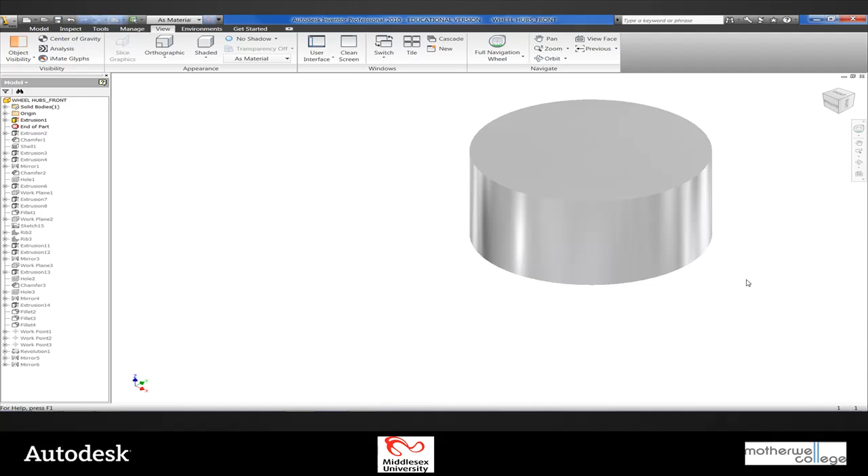And the hub started life as a simple extrusion like this. From this extrusion we added a second extrusion, as we can see in the browser here, and then this corner was chamfered, and the two side features were added as extrusions, with smaller extrusions added next, and then followed by a further chamfer and a hole running all the way through the part.

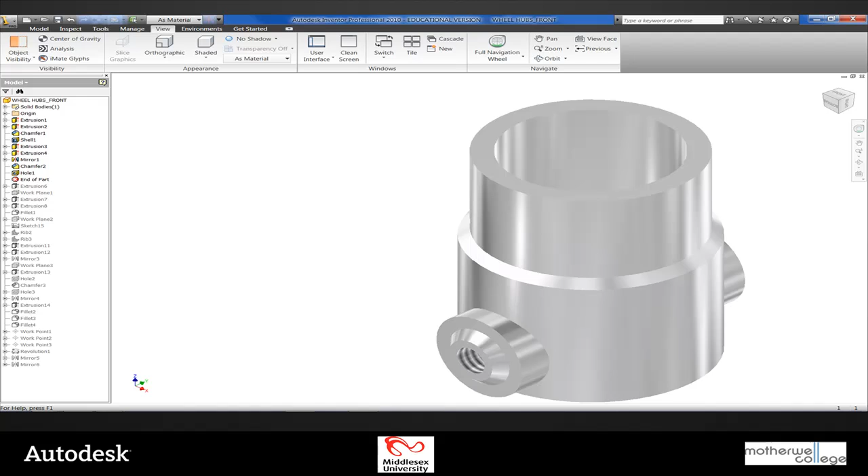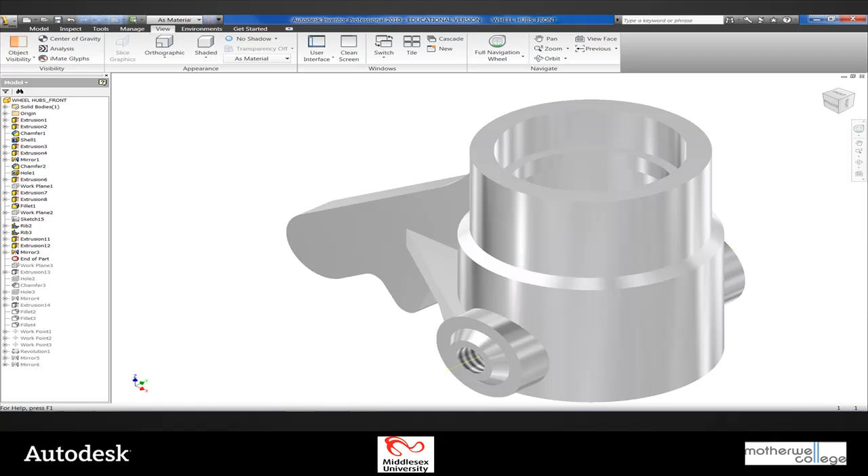This inner feature is added as a further extrusion, followed by this support on the front. The rib that adds the inherent strength to the hub starts life as this sketch, which allows us to use the rib tool and a second time for further strength, followed by an extrusion to add some shape. This hole is added near the front and then chamfered, followed by another hole here, which is tapped.

The mirror tool is used to place another instance of this rib, but on the front face, and then an extrusion creates the angled feature on the front here. A couple of fillets are then added, and the final couple of steps sees the part created.

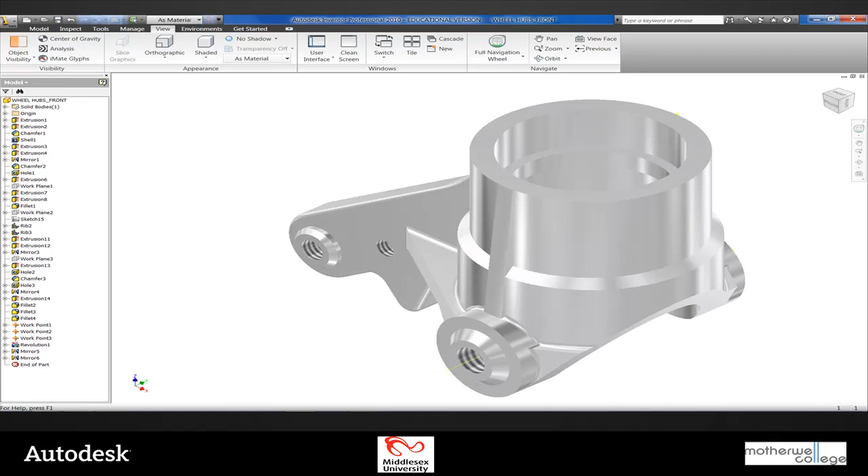So here is the part created in Inventor, and we're going to go through the steps in a step-by-step manner in order to illustrate exactly how this was modelled. So we'll open up a new part, say standard.ipt, and the first thing I'm going to do is to draw a circle centered on the origin,

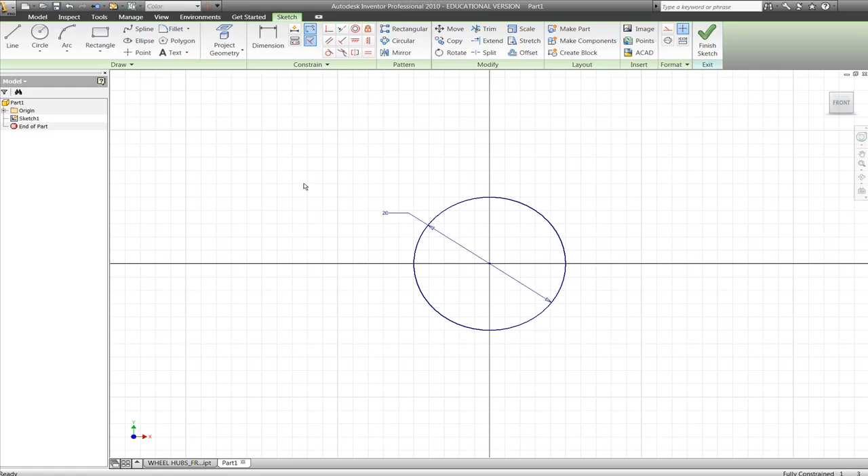and I'll either pick the dimension tool or type D and click on the circle, go away to place a dimension and edit that to 20mm diameter, hit return or click the green check. That gives us our 20mm diameter circle. So I can say right click, done for no more dimensions, right click again to finish the sketch, a third right click to go to a home view, and we can either click extrude or type E, and up comes the extrude dialog box. We're going to extrude that to a height of 11.5mm, say OK,

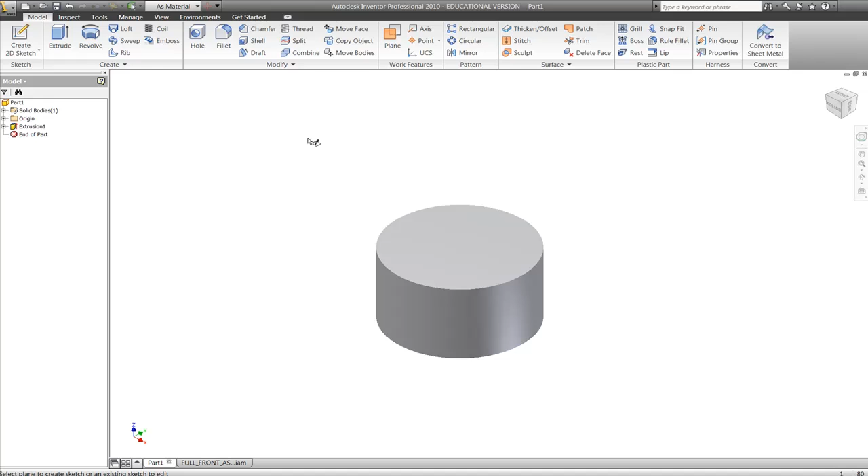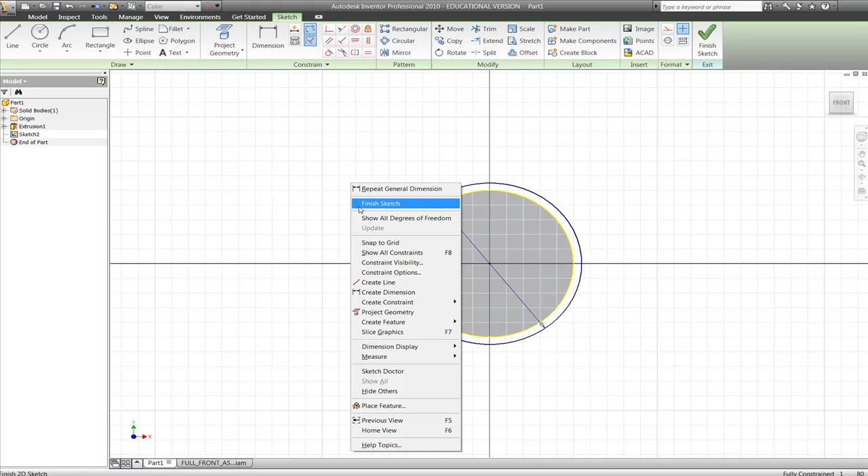and that's step 1 created from scratch. And the next thing we'll do then is to put another circular sketch on this face, so we'll click create 2D sketch onto that face, use the circle tool, pick up the origin, and we're going this time for a diameter, type D, of 22mm. We'll say right click, done for no more dimensions, second right click to finish the sketch, and we're going to extrude that sketch with the outer and the inner, a distance this time of 15.5. And that gives us the basic material to begin the modelling process with.

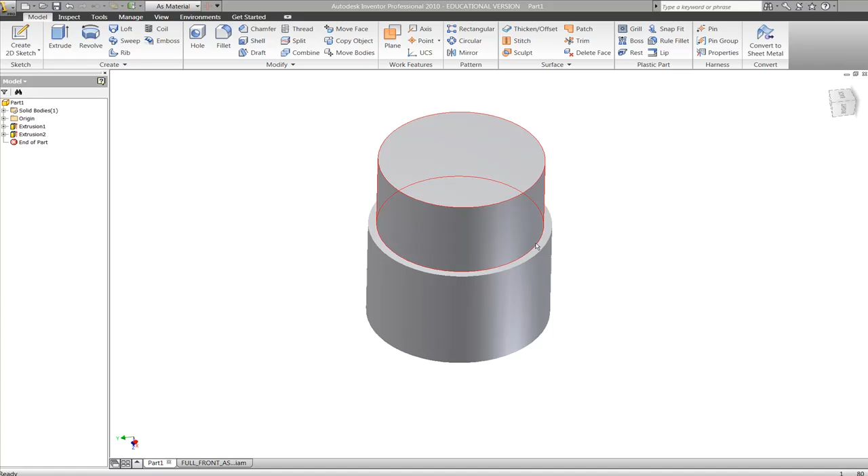The next step in the process is to take this sharp corner away by adding a chamfer. Here's a chamfer tool here. The value is 1mm, and I'm going to pick up on that edge just there and apply that chamfer, and we'll say OK. And we'll close that now, and we're now going to shell the material that we have with a wall thickness of 2mm.

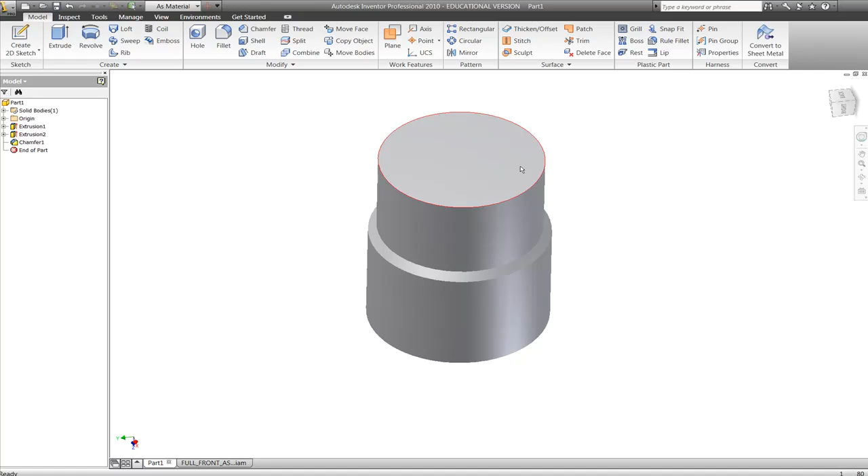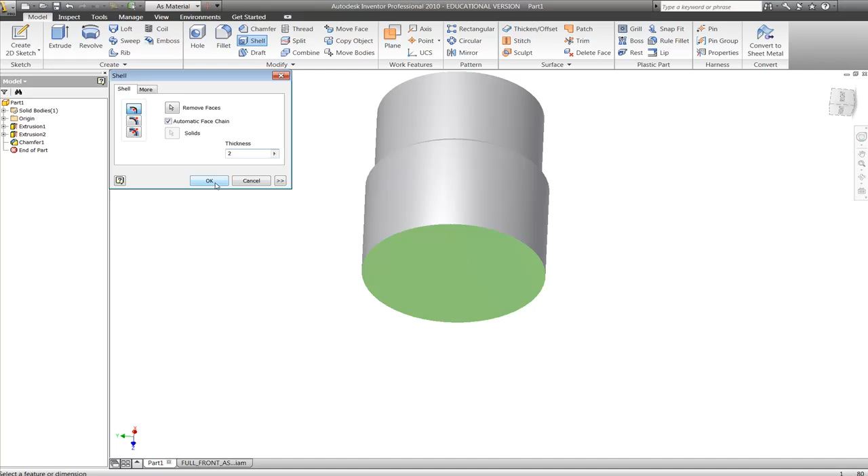So we'll pick the shell tool, up comes the shell tool dialog box. The button that's currently depressed is the remove faces button, so I'm going to take the opportunity now to pick that face. We'll hold down F4 and manoeuvre it around and grab the other face on the bottom. Stipulate a wall thickness of 2mm and say OK. I'll just use F4 again to allow me to inspect inside and out, and that's what we're after. That's the shell operation complete.

For the next step in the operation, I'll just go back to my isometric view for a second, and I'm going to go into the origin folder, and I'm going to pick up on either that vertical default work plane or perhaps that one, any of the two vertical default work planes. I'll go for that one. I'm going to right click on it and turn on its visibility, and go into the Model tab and click Create 2D Sketch and put a 2D sketch onto that surface there. And for the extrusion that I'm going to create, I'm going to sketch a circle.

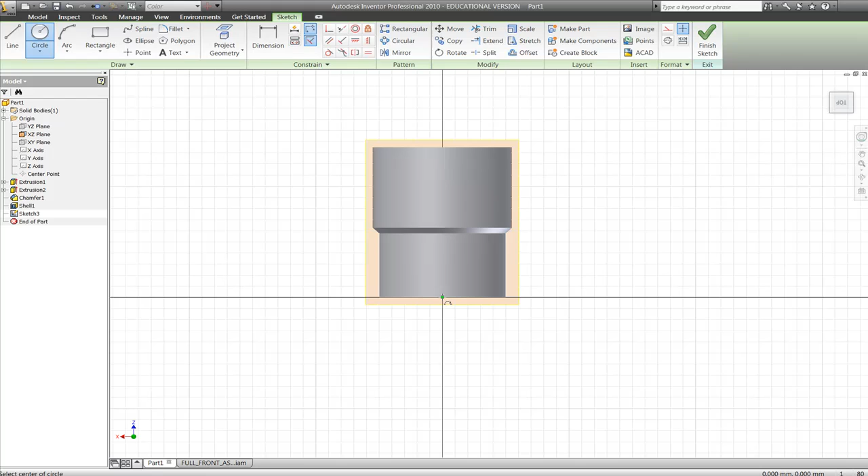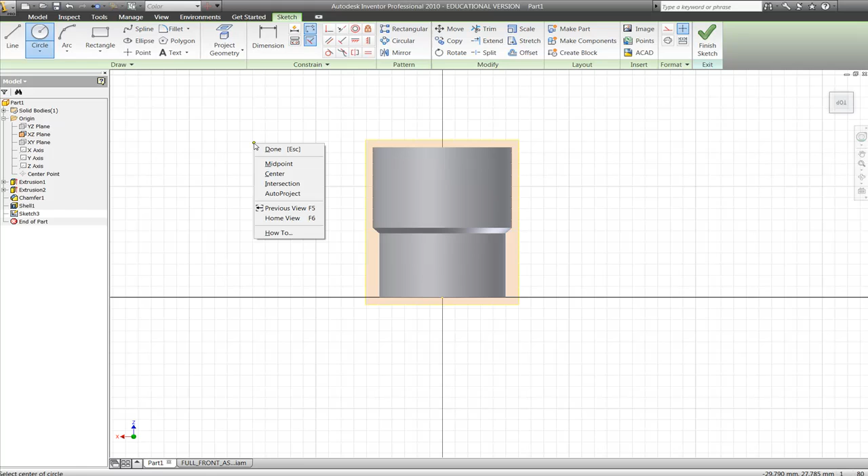And the position of the circle is going to be from this point here, roughly this distance. We'll get it right just in a second. I'm going to pick up the inferred point to get vertically aligned with the origin. And I'll click to define a center, pull away, click again. And you'll see that circle appears to have disappeared. It is in fact in the middle of the model there, so I think now would be a good time to right click and say done, and right click and say slice graphics to take this material away so we can see what we're doing here.

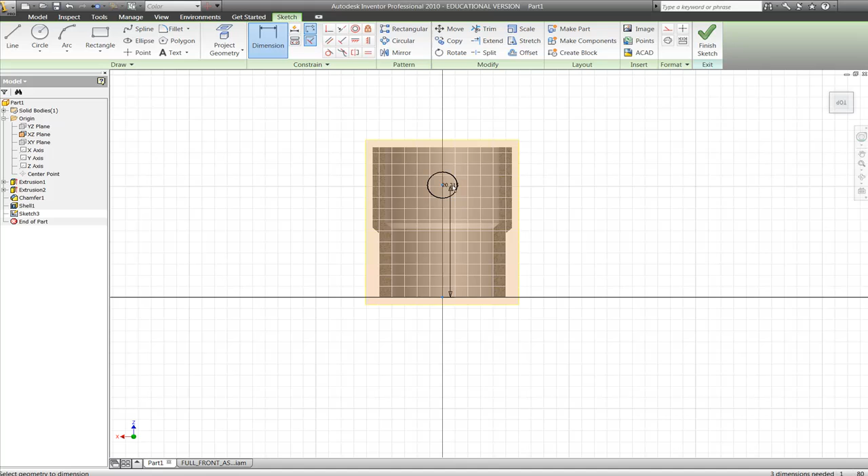I'll pick the dimension tool, just type D, and I'm going to apply a distance from the origin to the center of the circle of 24 millimeters. And while I've got the dimension tool up, I'll apply a diameter of 5 and say OK. And that's my sketch complete there, so I'll right click, done for no more dimensions, right click again to finish the sketch.

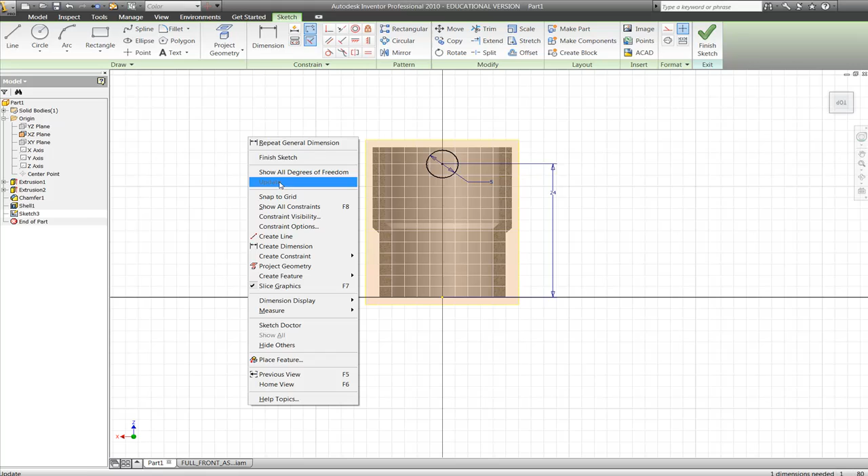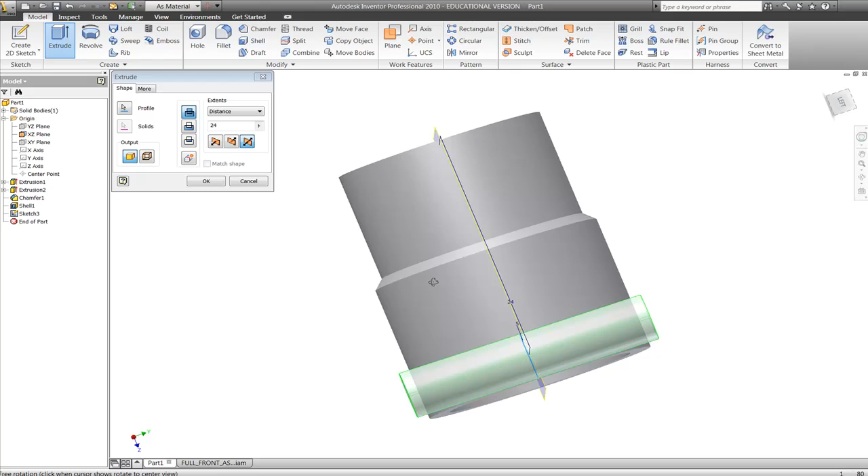And I'm going to extrude that circle. I want to extrude it symmetrically in both directions from the work plane, so I'll pick the symmetrical option here. Looking for a distance of 24 millimeters, we'll just allow it to protrude. And I'll say OK to that.